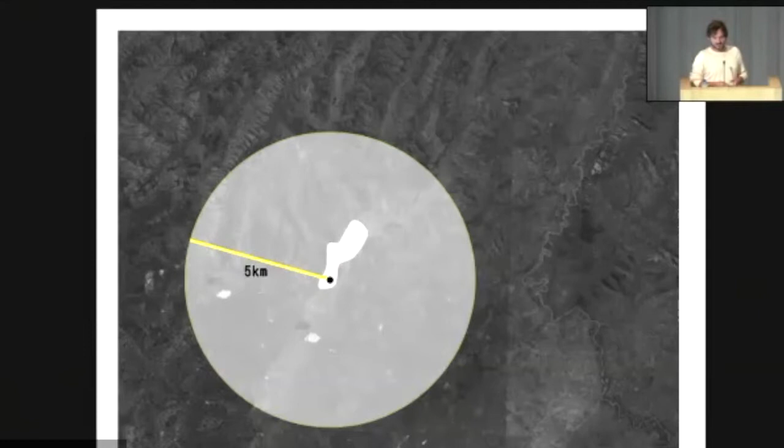It started as a kind of detective story. We had a radius of 5 kilometers, and we looked at all the materials available within that range. We had stones, we had talks with forestry management, we had talks with hunters about how they made things, and there were sisal cactuses, which were very fibrous and interesting to use.

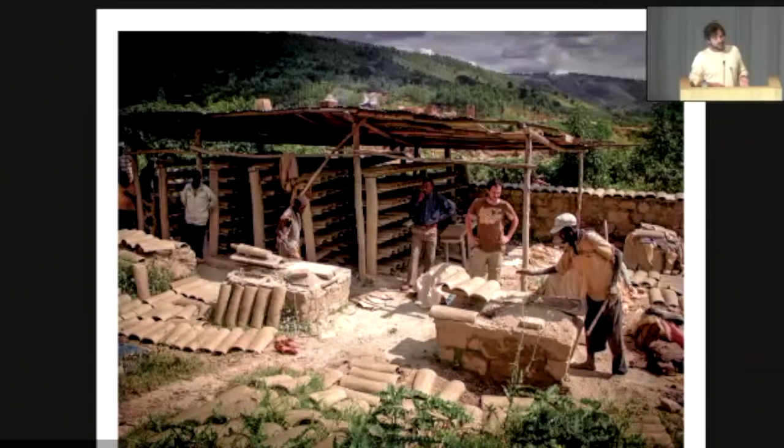There were also stones, but I think one of the most capturing moments during that first project was realizing the resource straight beneath us, which was earth. We had this encounter with a villager who was taking the resource straight out of the earth, and developing adobe blocks, sun-dried blocks, dried for approximately 2-3 weeks in the sun, then straight used in the construction of their homes.

It was a very interesting material, also because it was quite low threshold, but it could also be reused in an eternal time.

Between this picture and the previous one, there's one year. Because of course we had this understanding of a collection of locally sourced materials, and we were very interested to continue with the materiality of earth. But we didn't have any understanding of it to the extent that we could say we can build with it, so we went back.

We had this full year in which some of us, one of us went to do earth studies in Grenoble. We had a full year of researching and doing workshops. We left once we found we were ready, and went back to look further into the material.

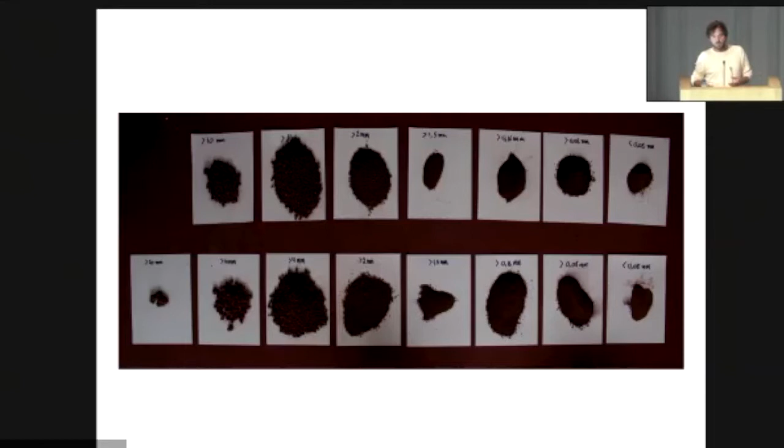These are tests done in the early times. There's a sedimentation test, which you saw before, to understand the granulometry of the finest particles. There's the sieving, in which you determine further the amount and types of earth you have in your soil.

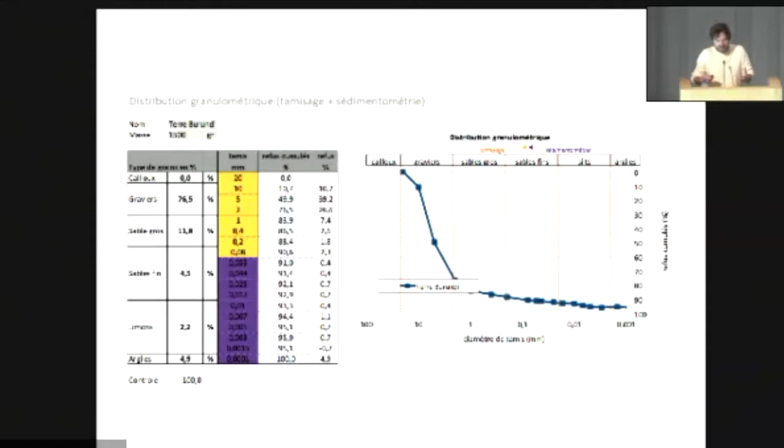With this, you're able to develop graphics you can show to clients, to say, look, this is really academic research material. But actually, in reality, it's a very tactile research.

If we go back to this first study, with that we could know, okay, we have this type of soil, and this type of soil means for us that there is a technique useful to use this soil which we have.

The decision was to go further with compressed earth blocks. The reason was the need of a machine, so it had a slight mechanization in the process of the block.

Initially we thought, okay, we'll make our own machine. On the internet we found an open source site in the US with plans to make your own machine. It took us one month to actually find a similar machine, which was sent in the 80s, just next to the site.

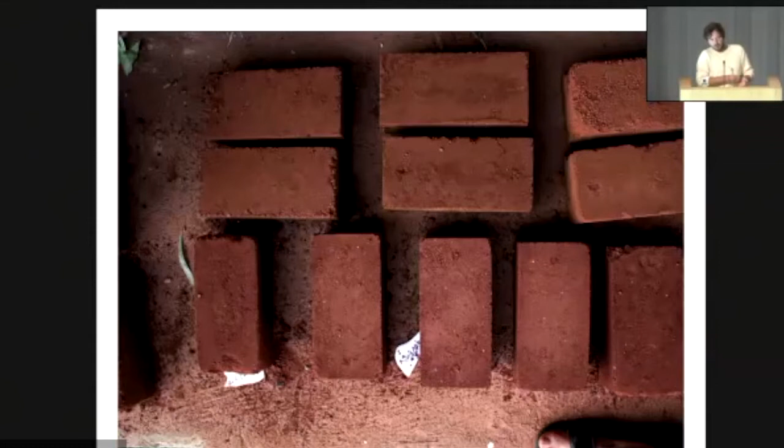So the next step, okay, we have the machine, we made our blocks. We made a matrix, we made a selection of blocks, and then we had to choose which block we could actually use. So we needed to understand the strength of the block.

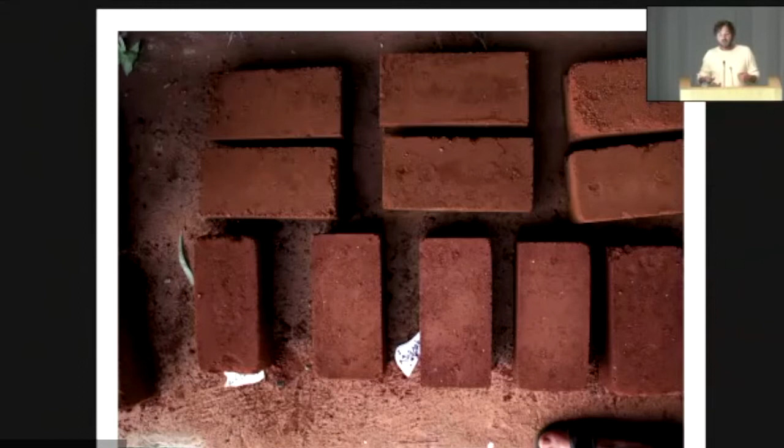Again, we went back to YouTube. YouTube is a wonderful platform of teaching. There we found certain types of machines we could make to test flexion and pressure. So we did that, and we broke all of our blocks like that. We could understand which one seemed the most strong and most interesting.

And then we started to design, because then we knew actually with what material, with what construction element we could start designing or building.

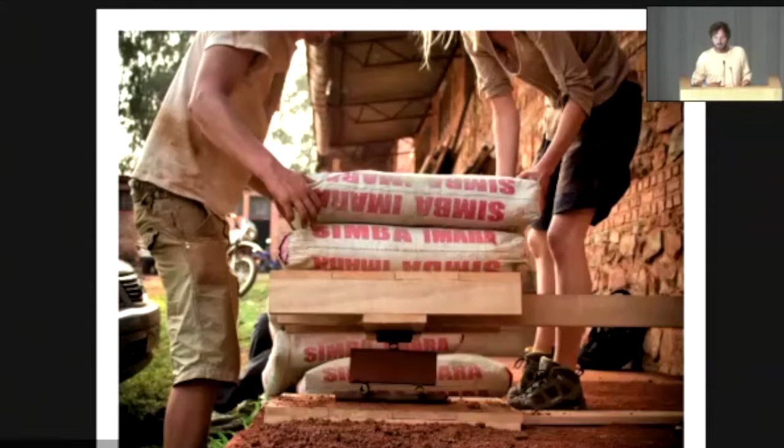There's another element which is interesting to understand how this first project came to exist. There was no contract at all. We were not insured at all. There was no kind of entity which would save us, let's say, if there were problems. This was actually a team of people, workers, craftsmen, which all together tried to make this happen, also because we were not able to back ourselves up with norms or anything else.

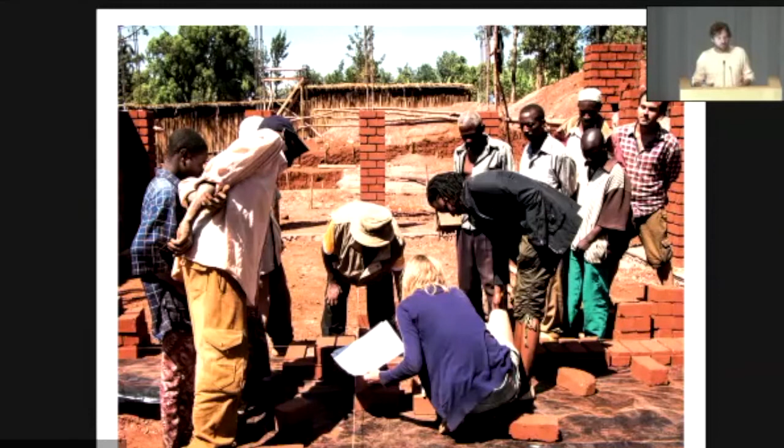Within that, my biggest teacher right after graduation—this is a project of, I think, 12 years ago—was the foreman and the craftsman. I learned from him what I could never imagine learning from any teacher. It was really the understanding of material, the texture of things, of the resources that are in hand, because he always worked in that region. He knew exactly where to find stones, because he understood the geological layers almost, and he knew these are hills and clay goes down in the valleys, and you have rocks which become exposed, and these rocks are interesting to use for the parts of your building that you need to reinforce against water, and so on. So it was my best teacher.

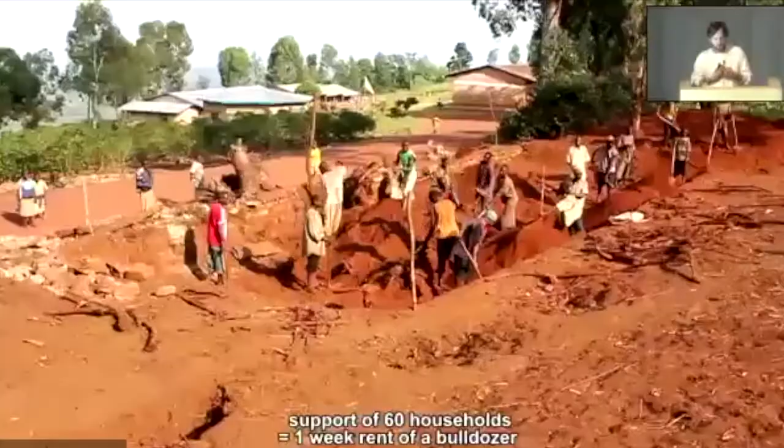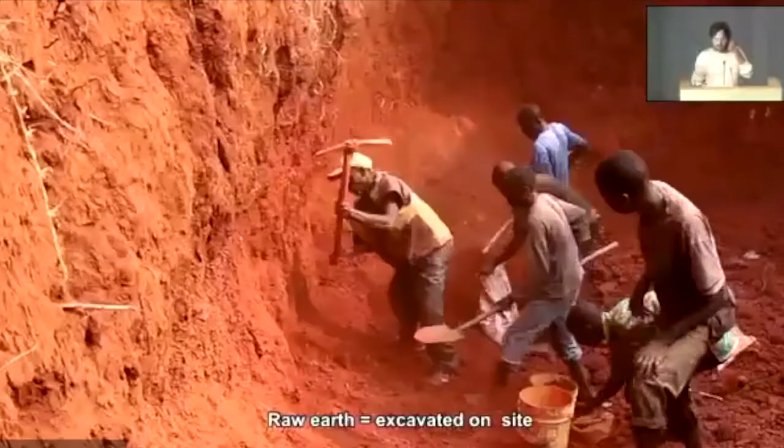Thank you so much. I like to show this one because afterwards there's another key project which has a similar video, and for us this whole construction process was so enriching. We had an enormous amount of people on the site working, because when we arrived we had a catalog of materials from school which were not at all possible to buy there. So using the material on the site, we first designed a kind of production.

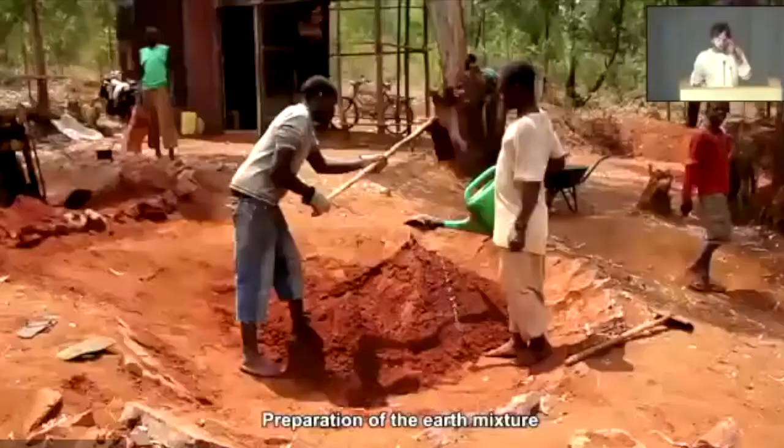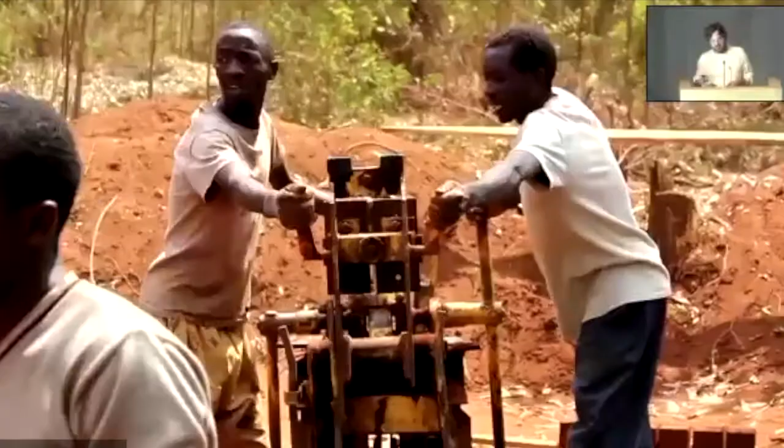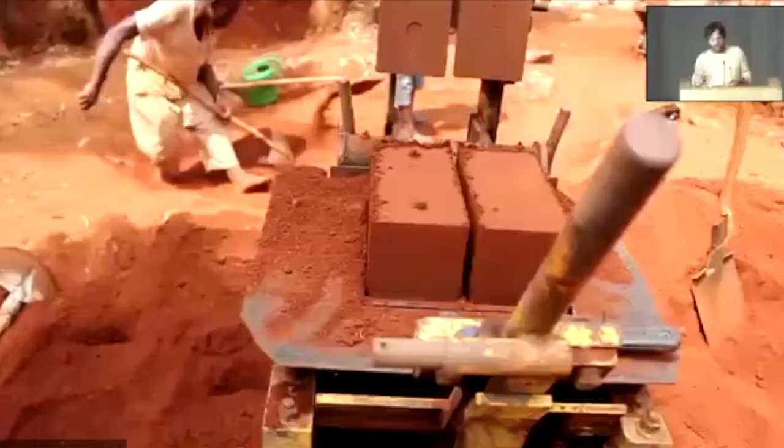So the building site, before it became a construction site, it was a production site. The material earth was sieved, the smaller particles were used for the blocks, the bigger particles were used later on for the squares. There was a whole storage unit on the site in order to dry and cure these blocks during 2 to 3 weeks. So you start understanding a construction or a building through a process of production, rather than buying your materials straight away and building with it. So we got quite close to the resources with this project.

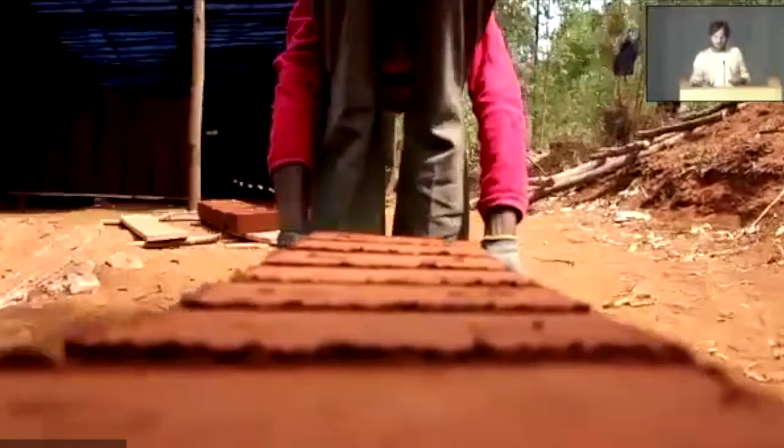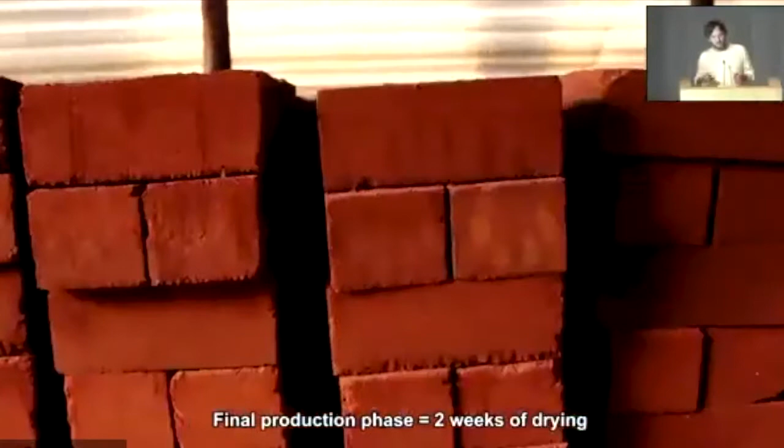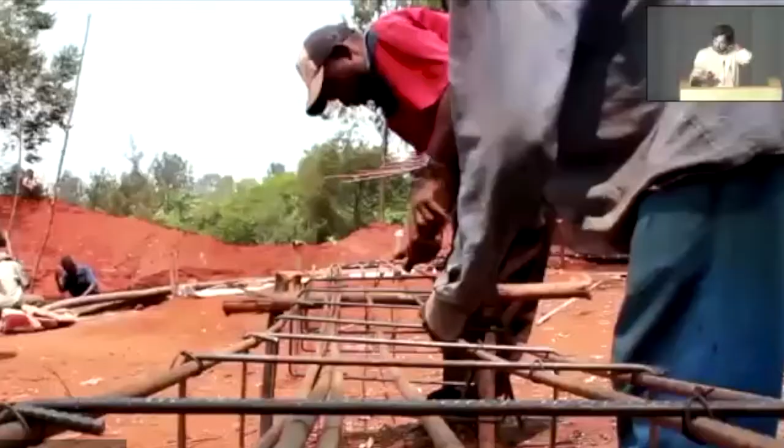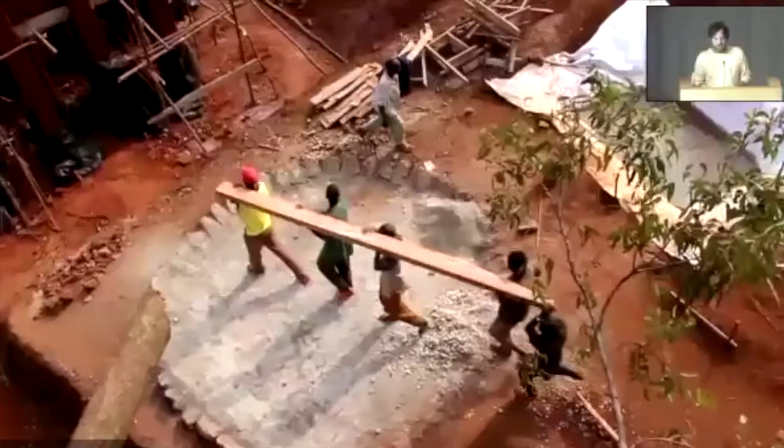And I think the elements we learned from this project were things we afterwards tried to implement in Belgium, because you have to imagine this was our first project, so we knew nothing else but this way of working. Here you can see the building itself was completely made with compressed earth blocks. It has some reinforcements in certain columns due to earthquake resistance, and then it was just earth mortar. The wood as well was cut on site from the place we were going to construct, done 6 months in advance in order to dry as much as possible.

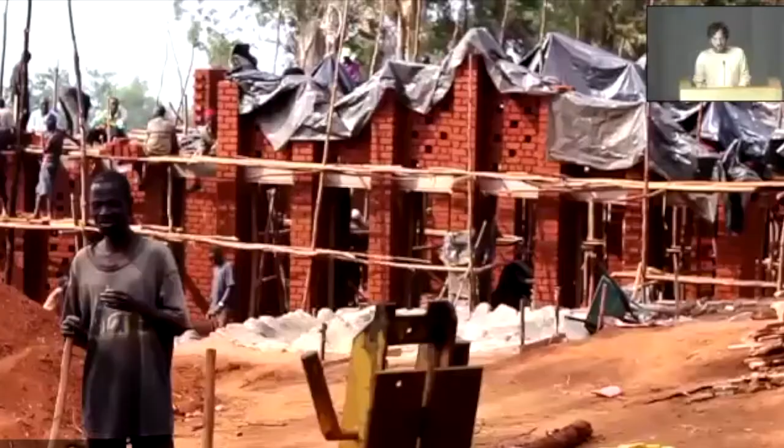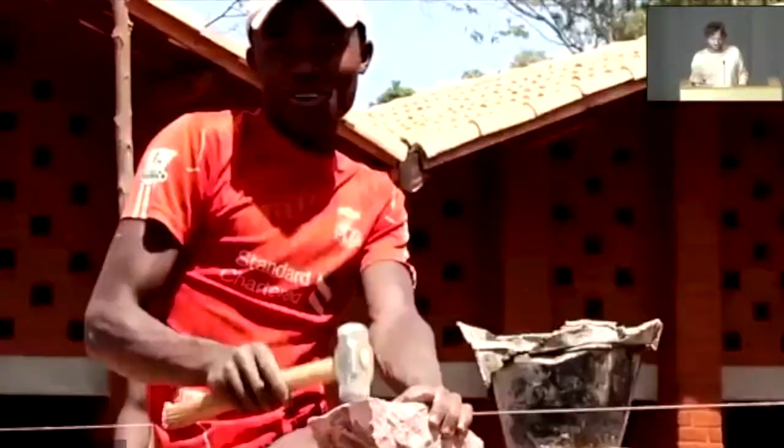And this was for us quite an eye-opener. The same with the sisal—we worked together with a hunter who explained to some workers how to make from the sisal cactus a rope, how to knot this rope together to make a large hammock, and how to place that hammock later on within the library. So you had all these stories which were starting always from the resource. They were very proud of that big hammock, I have to say. So yeah, this is the first project, but also a key project for the whole development of the ideas and visions.

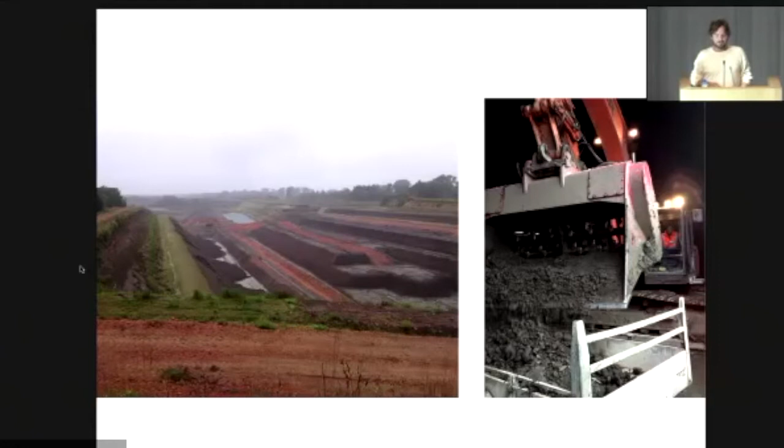But this meant for us, how do we normalize and prescribe a material which is locally sourced and not on the market? So first it meant creating a protocol - doing similar testing, gathering all the resources of the region: sands, broken gravels, clay, and creating a matrix of different mixes to test. This time it was not with our own wooden toy, but at a laboratory in a university where we got official results.

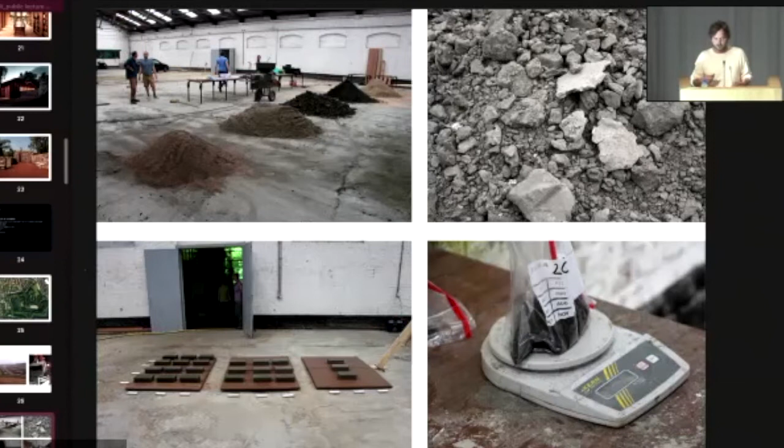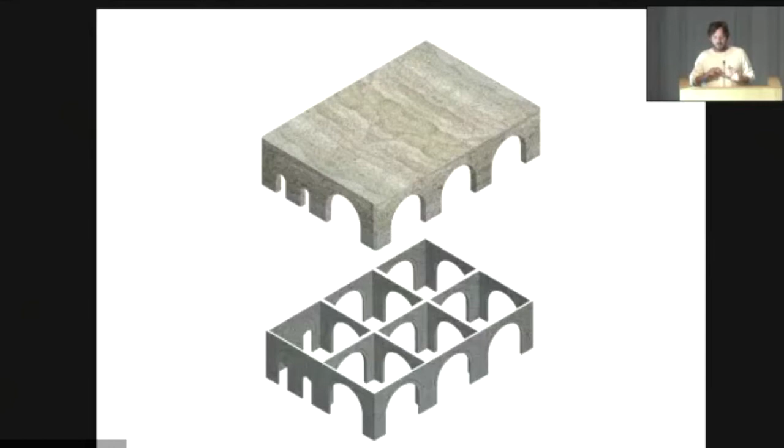Here you could see the system - it was a complete load-bearing element, which was then duplicated in a connection of spaces, of classrooms. All around there was this kind of hempcrete insulation. It was as simple as that, because it was standing also in an existing hall, which we decided to keep.

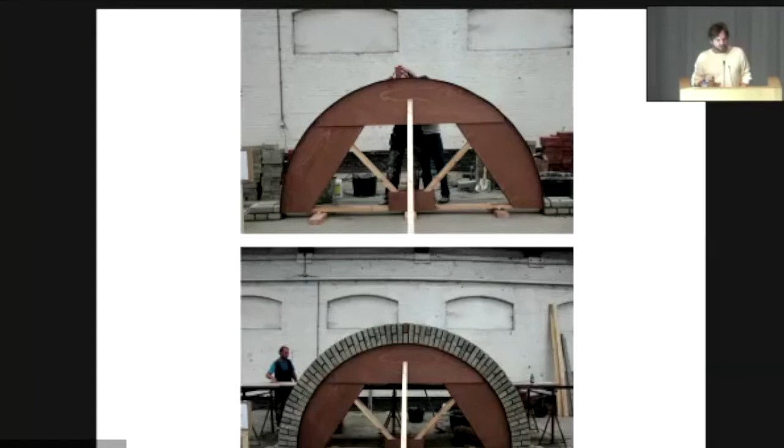Another element - so there was this part of creating a protocol for a locally sourced material. But secondly, we didn't find masons who were able to estimate the time it would take. One, because they were just not feeling comfortable with using a compressed earth block, which they never used before, but also because we couldn't find masons who still did really load-bearing brickwork, because nowadays of course these are all reinforced.

The same happened with the engineer we worked with - he was not really feeling comfortable with the idea. For the engineer, we got a historical professor in architectural theory to help him out, to explain a bit how this works, like in the Middle Ages.

Another thing - we contacted the contractor to create a prototype which would enable us to understand the timing he would need, and for the engineer as well to actually just test it out, if it really stands. A very simple thing, but it meant us not being behind the computer drawing arches, but making the blocks and creating a different process to reassure everybody that this actually also works in Belgium.

So we had done all that, and then the next step was we could estimate our arches. And the estimation went times 10, of course, because in Burundi it's interesting to use these materials since it's labor intensive - labor on their economical market is quite low, materials are quite expensive, so there it has a kind of economical logic. In Belgium, it has no economical logic at all - it's completely against the principles of our system.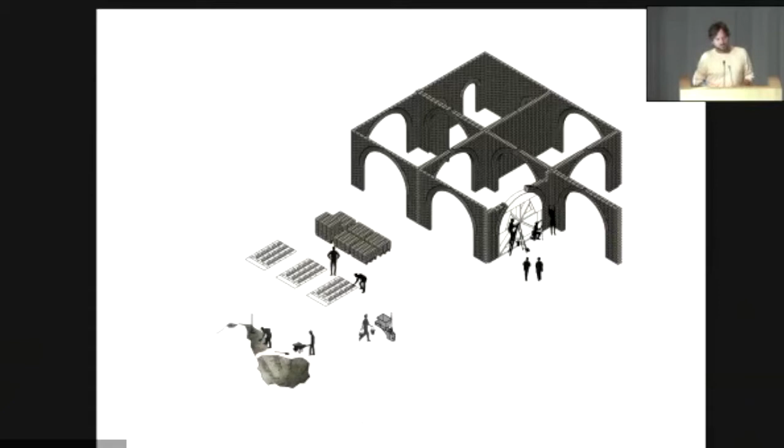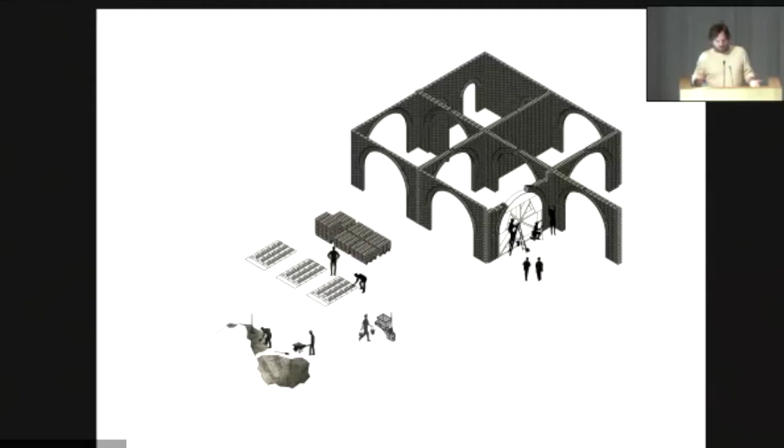So we needed to come up with another solution, which meant building or producing all the blocks with workshops - it was kind of new, well, this project is 6-7 years ago, this is material or a method from back in the 60s. What is happening now is the same but a different situation, because also in the 60s these kinds of systems came up. So to produce all the blocks, we organized a 3-week workshop, and we produced with participants 17,000 blocks, which we then sold for a symbolic €1 to the contractor who is going to mason it.

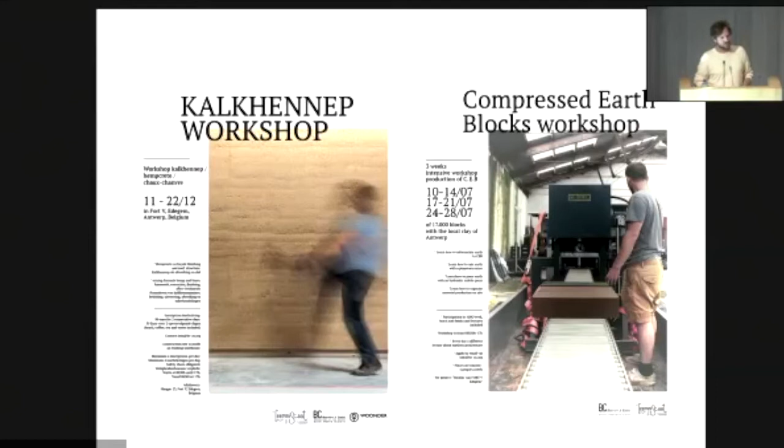Not only were the compressed earth blocks a problem, but also the hempcrete was an issue, because it's also quite a labor intensive material, and at the time not very used by many contractors. So for that kind of whole insulation construction, we used a 2-day workshop during 4 weeks, small 2-day workshops to implement. These workshops had very heavy duty and hard labor, but mixed with lectures.

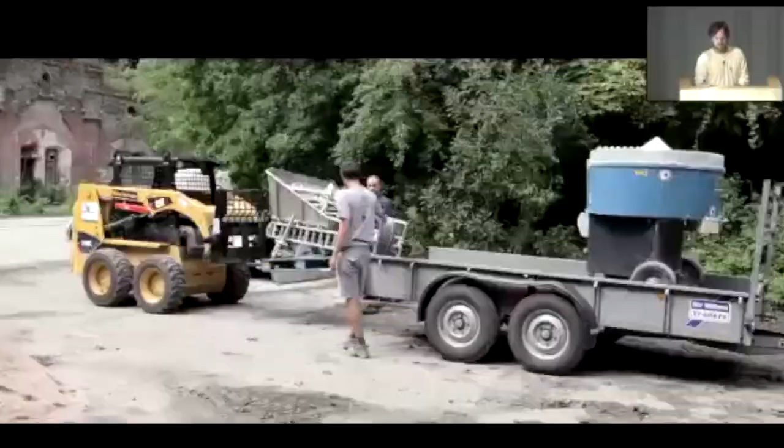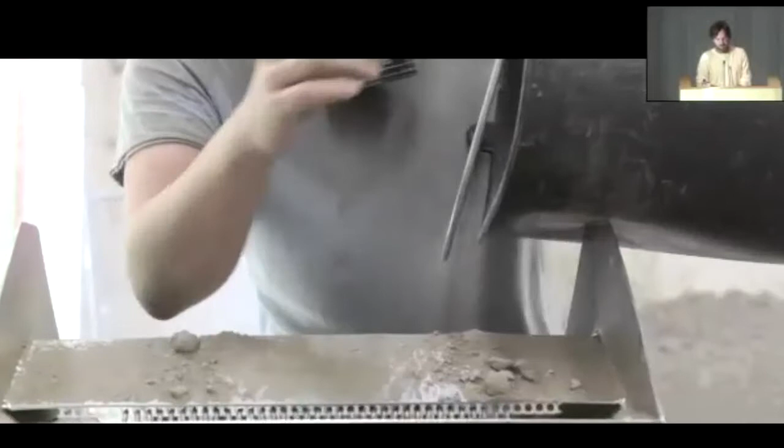We took on parts of the execution for a public project under the contractor. This meant we had to rent equipment, bring in all the material, and sieve it. This is the first days of the workshop in which the students got to learn the machines, hydraulic presses, a different type than the manual press used in Burundi. Here you can see the production line, which was set up also on the construction site. We brought in the resources and produced all of them on site.

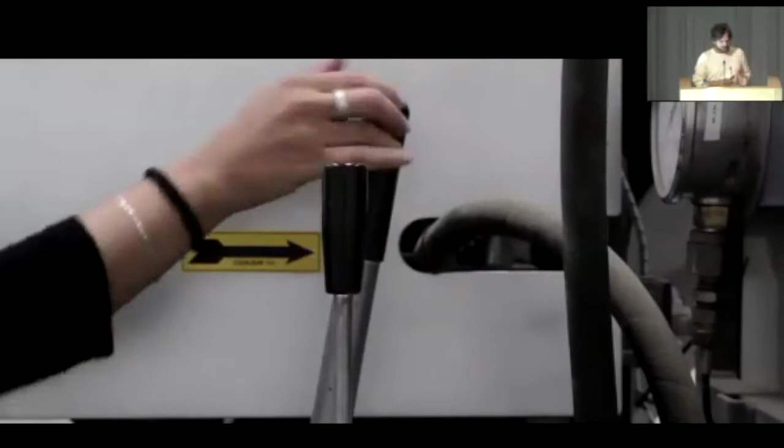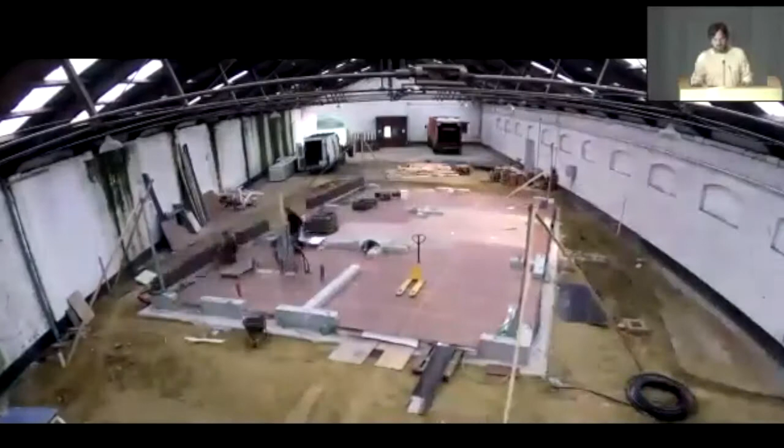There's a protocol we had to write out for the client and for the engineers. Each, I don't remember the exact amount, each 100 blocks, one had to be taken out to ensure the quality of this material, because it's not bought in a shop where you have a tag, and if it breaks, you can go back to the producer. These were the lectures, and then these blocks were given to the contractor, which started to mason within.

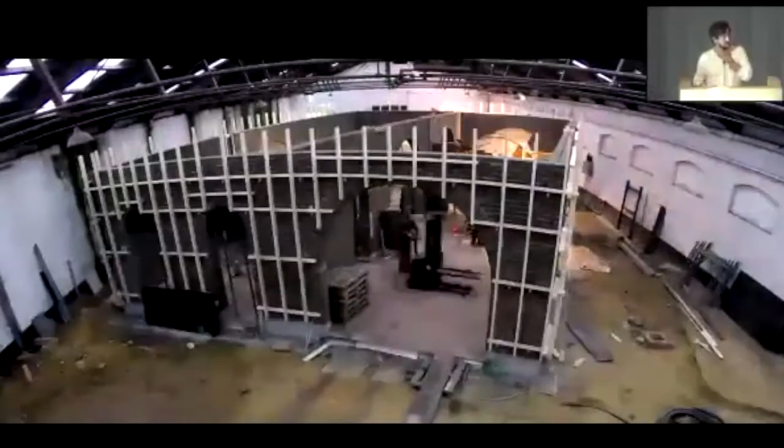To do all this, there's a need of working with the team, having a good relation with the contractor, because everybody is taking risk. Everybody here is experimenting, and there was an issue, for example, with the engineer not accounting for the amount of water in the block that has to dry. So at certain moments, the arch was starting to get a bit too low than was meant.

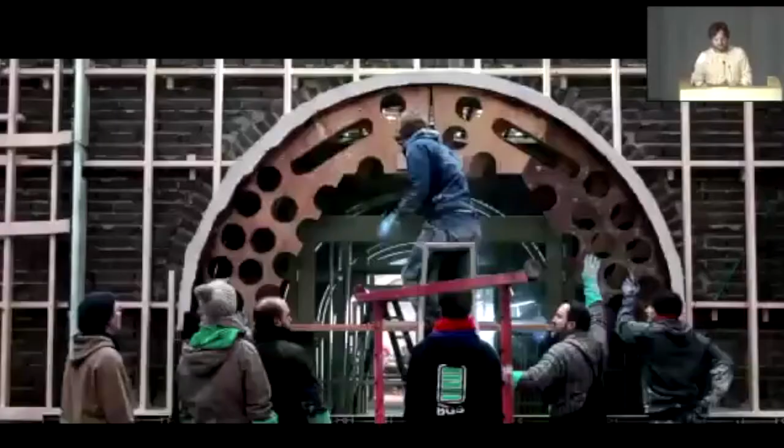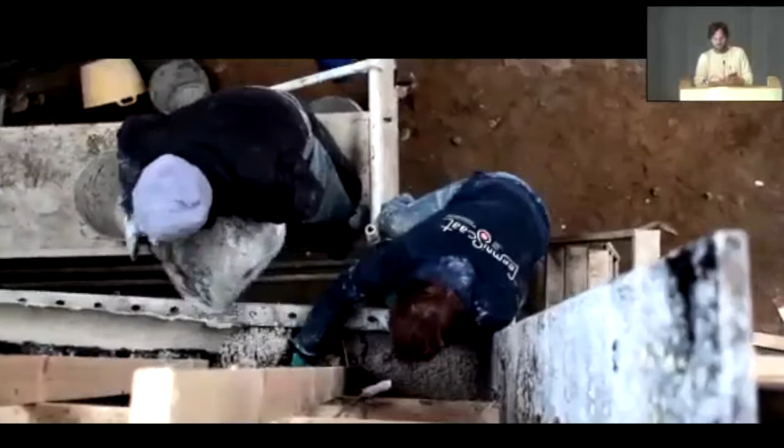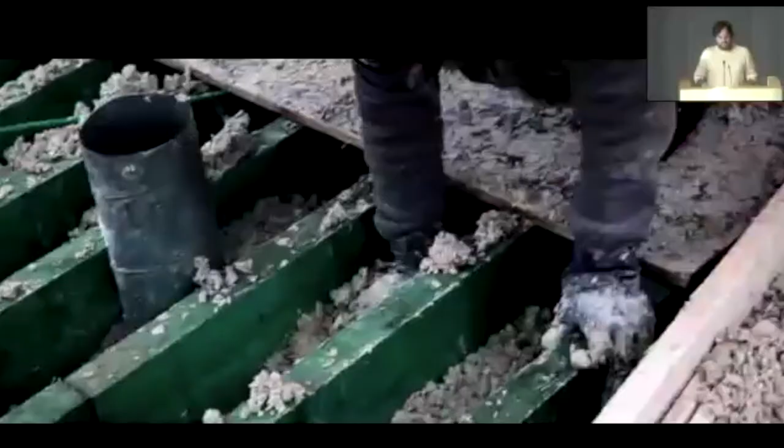This is the workshop for the hempcrete, which was set up. Hempcrete being a combination of hemp fibers and lime, which has quite a good insulating value, of course not like the best chemical insulation materials. And so the whole roof was also the first time to test it out. The whole roof was rammed and insulated, so it's a very simple system.

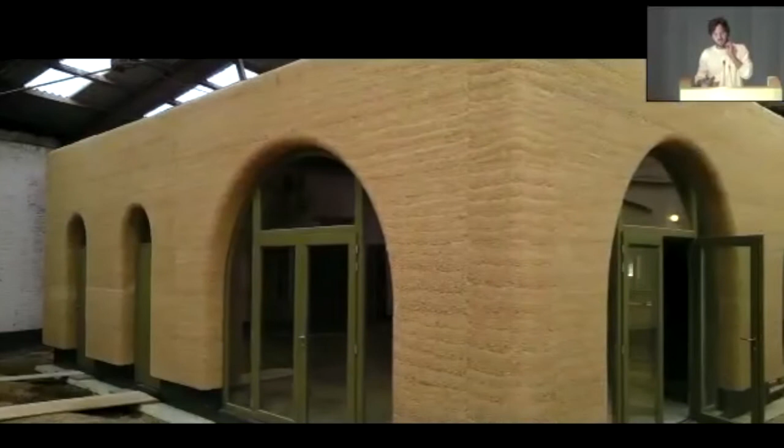The reason why these projects are so simple is that at the beginning we already knew we had to do this within a workshop system. So we needed to make a building which was very simple, readable, not too complex, not too many technical or super difficult details.

I think it's really nice to see these two projects next to each other. Maybe if I have 40 minutes, this might be enough. You can go back to the presentation.

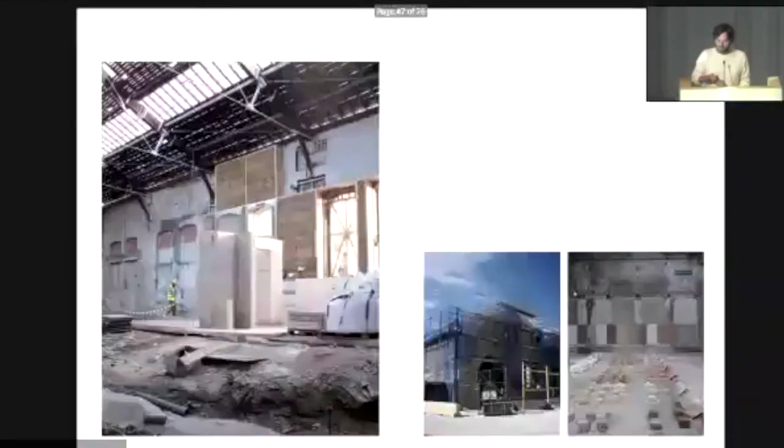I'm going to jump to this because this happened after, and it makes logic in the story. Workshops, okay, how can we upscale? Because the workshop is not the solution to build all of our public buildings with biosourced and geosourced material in workshop types. We can't keep building 50 square meter pavilions forever.

So the next step was to understand, okay, it works brilliantly, people are very happy, but how can we start to upscale and make this possible for other people, other architects more exactly, to use it? And there came the idea of BC materials.

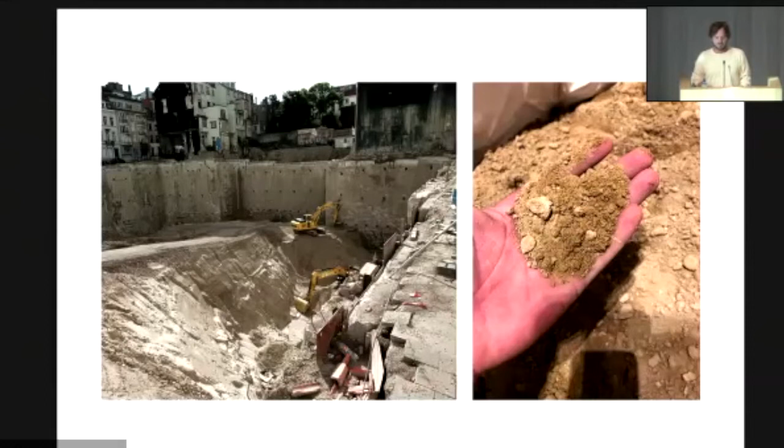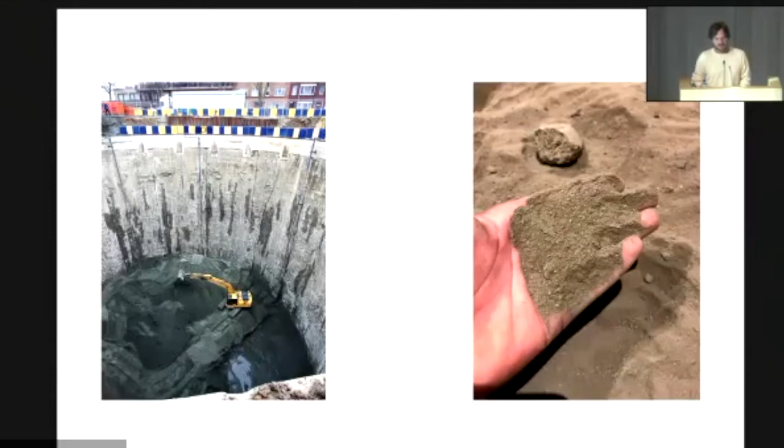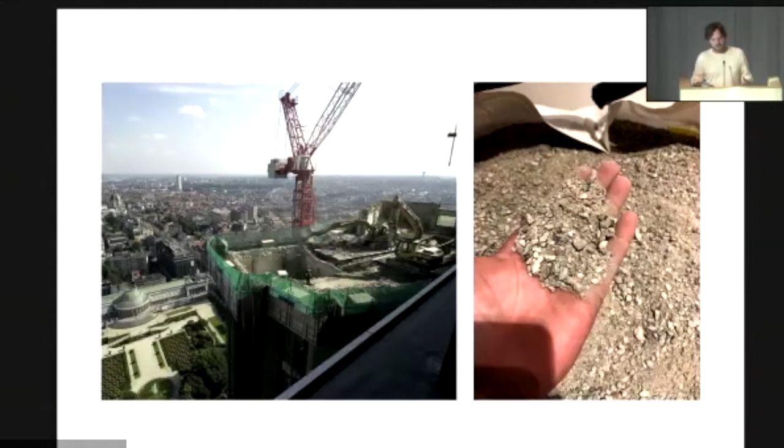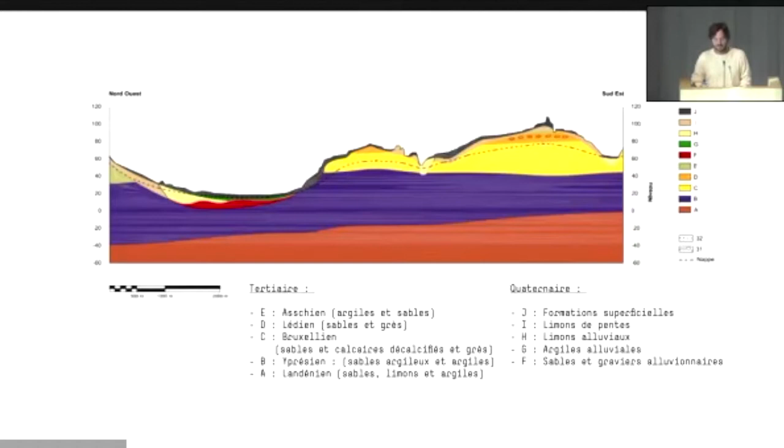This meant we had to research all the different types of materials makeable with the excavations of Brussels. We've got three main products which went through the whole stages of normalizing, regulation, and so on.

These can be bought at the cooperative: you have the Brickette, which is a kind of compressed earth block; you have Brusseleir, which are earth plasters — we've got them in 5 colors if you want; and we have the Kastar, which is a rammed earth mix. We're not executing anymore because it doesn't make sense, but we're preparing and developing mixes so that contractors can use them or architects can prescribe them.

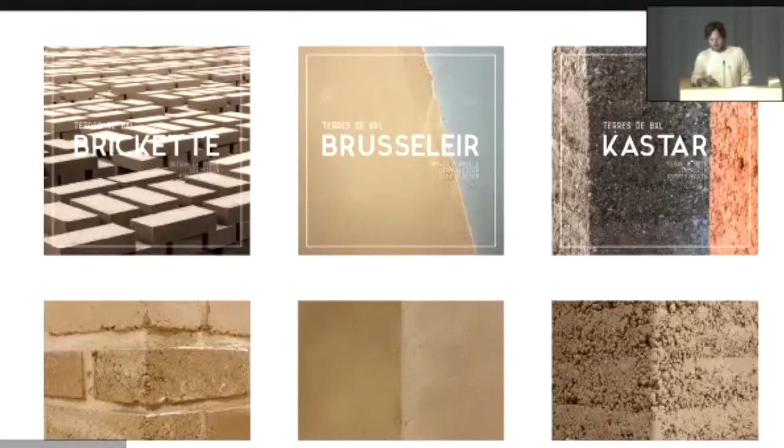There's a certain number of buildings in Belgium in which the materials have been used, or where we've been linked for consultancy in order to upscale this whole vision — in Bokreek and many, many more.

So the moment came we had to build our own production facility because the amounts became bigger and bigger. Of course, we have architects, so they designed the production facility. We have some people who are handy, so they built it themselves, and we got a site for 5 years, so we had to invest ourselves. Our whole building is also demountable because we know we might have to move in a few years.

These are large concrete blocks, third-hand construction blocks that you just stack on top of each other. The whole roof is fixed with — I don't know how you say that in English — the straps that trucks use to close their loads. That holds the whole roof to the wall.

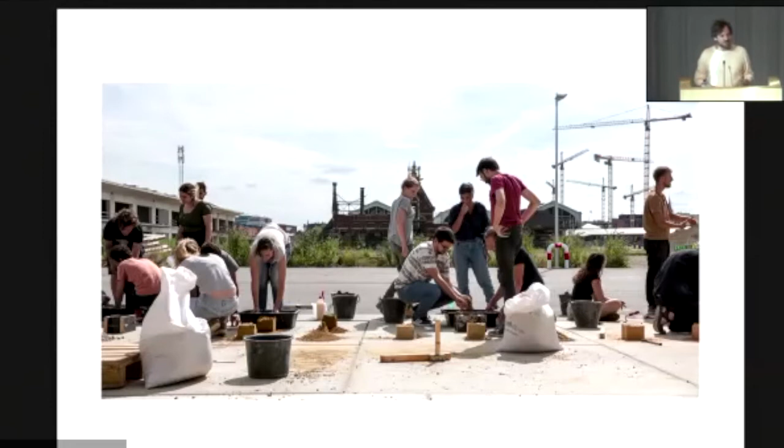And what happened, and that's when BC Studies also made more and more sense, is we got visits from schools and universities to follow courses and workshops within the production hall, because suddenly we had all our equipment ready, and architects were calling us to develop prototypes for them. At a certain moment, within our construction hall, we had groups of 50 students coming in, trying to understand how the material works.

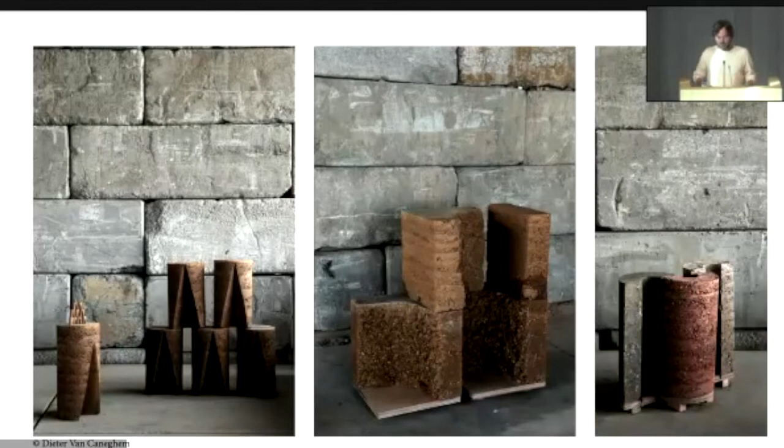A whole new line of work started for us as well: sensibilizing students, but also young architects and construction workers. We now organize workshops for construction workers at their sites, to make sure that what we develop is also usable on the market. The next step is to make sure the prices work on the market too, because that's still the next step — to understand how this is viable for larger scale projects.

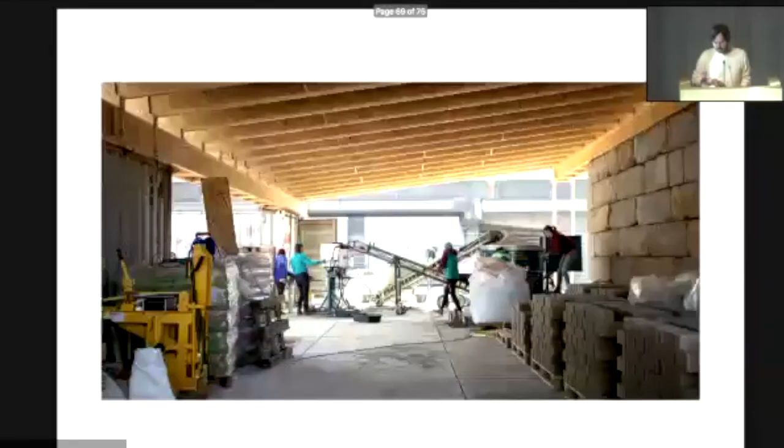A very last one — now I have to go back. Maybe I want to end with one project, this one here, in the south of France, which we started.

For us, this is kind of a bullseye project in the sense that we've combined our three entities. We got this commission from the Luma Foundation, which has a chapter in Arles called Atelier Luma, to build — we renovated — their new workshops and laboratories, where they develop new materials from the resources of the Camargue.

So for us, a kind of dream client, which was kind of researching the same thing. We started this project on very thorough research already done by Atelier Luma. By the way, this project we do together with Assemble Studio from London, to map out all the resources first, and not only the resources but also all the contractors and associations linked to construction.

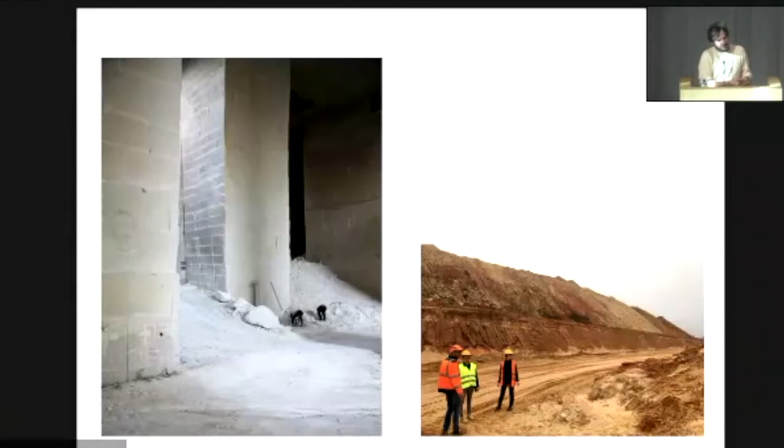The first days we did the same, but went more precisely, understanding there's a quarry, there's quarry waste, a kind of white powder that comes when they cut the limestone stones in the south of France - a waste that's quite interesting. Similarly, there are sand quarries where they wash the sand before selling it, and in the waste system there's a kind of clay soil left behind.

With these first inputs, we started again understanding what were the possibilities of the local resources we had.

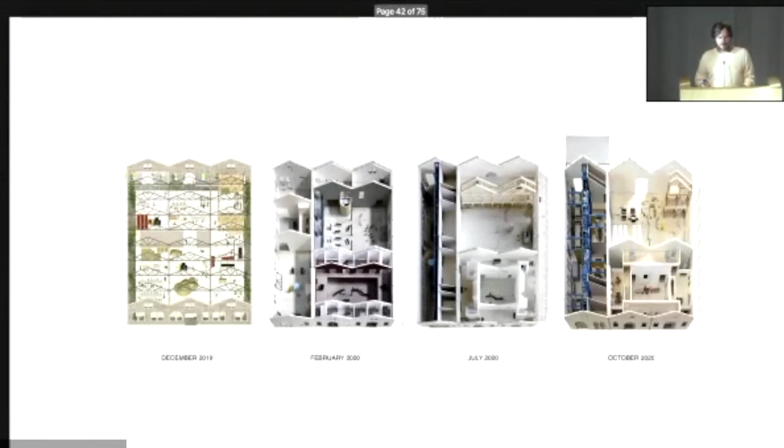Doing so, we organized our work not as a typical commission in which you work and develop, but we worked in residencies because we wanted a very close collaboration with the client and also with Assemble from London. Each time we came for one full month with the whole team on site, working on models, samples, and prototyping.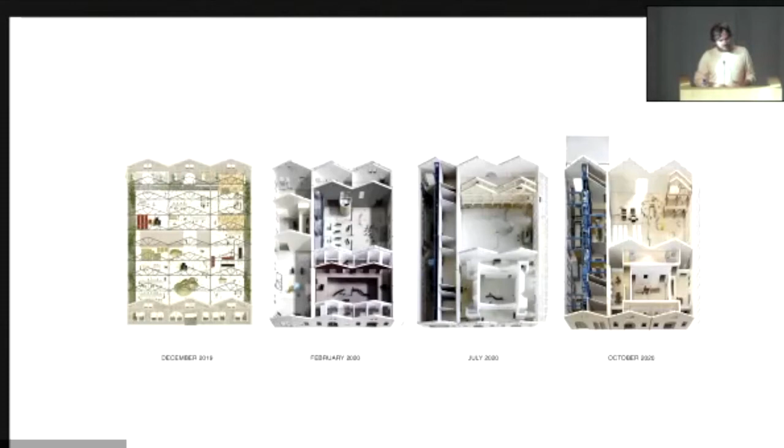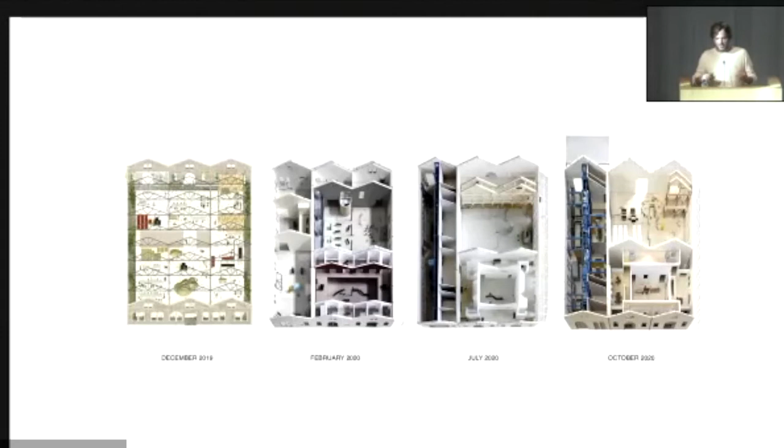So there was a completely different way of experimenting and looking at the building as research in itself. The building was a prototype, the building was a research.

From samples, the models became bigger and more concrete, in the sense that we developed a kind of rammed earth very specific to the site, reusing the white powder of the quarry. So we got this beautiful white rammed earth, also reusing the gravels from the demolition of the site.

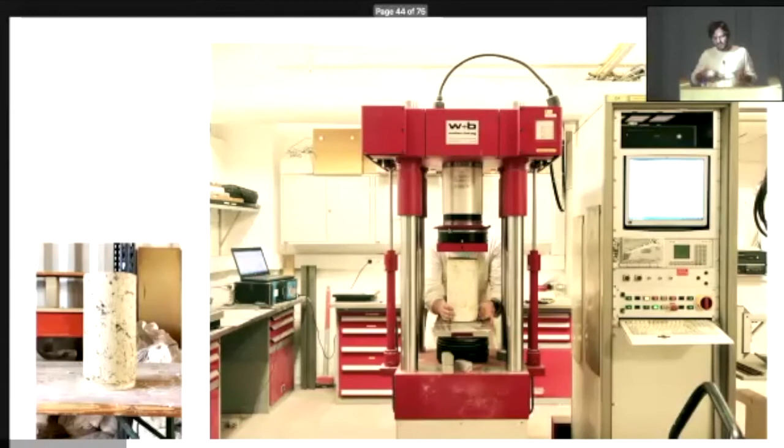So again, these kind of lab tests, creating protocols for the construction, and the machines get bigger and bigger each year, I tell you.

It's an interesting question about digitalizing, because these are new machines being developed in Toulouse, France, where mechanization and palletization are included in the process of making these kinds of blocks. There were also plasters using algae in place of clay, because dried algae has similar properties to clay.

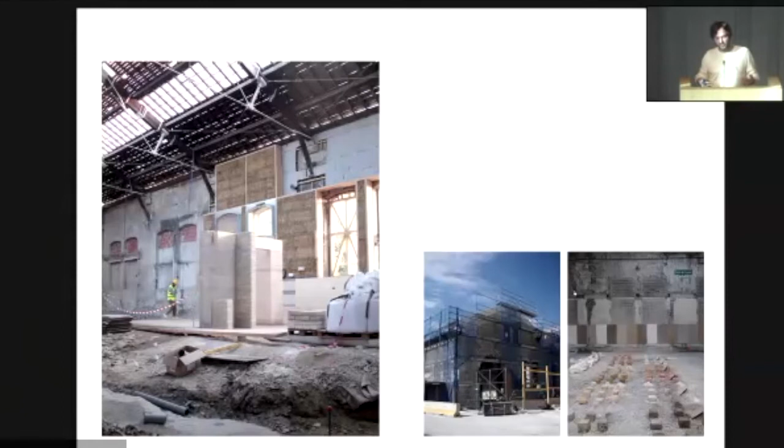It's an ancient plastering system coming from Japan and Korea. So developing our whole set of materials, which then goes from sampling on to prototyping again.

Prototyping the wood, we were working with clay-based oils. It's a super interesting project because it really tries to define things, and it's pure experimentation. It goes quite far in that, but is also looking at the building as a mine itself.

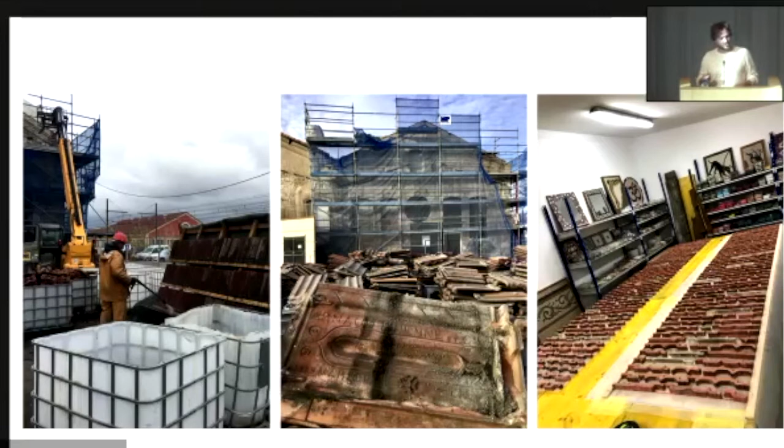So the tiles are reused, of course, cleaned. The broken tiles are reused in decorative terrazzos, but the tiles are also used in the exterior render. The whole building is insulated with rice straw, because there's an enormous amount of rice used in Camargue.

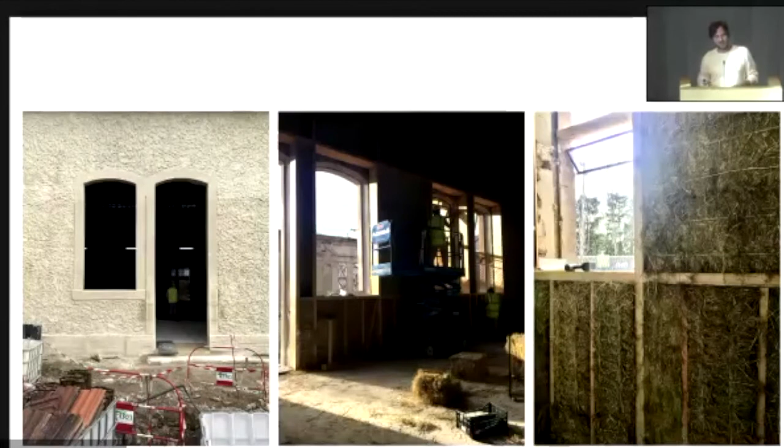Next to that, you create this kind of content around the buildings before even starting. With BC Studies and Atelier Luma, there's a whole trajectory where you have a chantier d'insertion, in which contractors actually come to test out materials and build the prototypes, workshops and seminars.

So we're starting to rearrange even the way of contracting, and seeing if people can learn from other people. This means our plan becomes almost a plan of prototypes, a plan of studies and research.

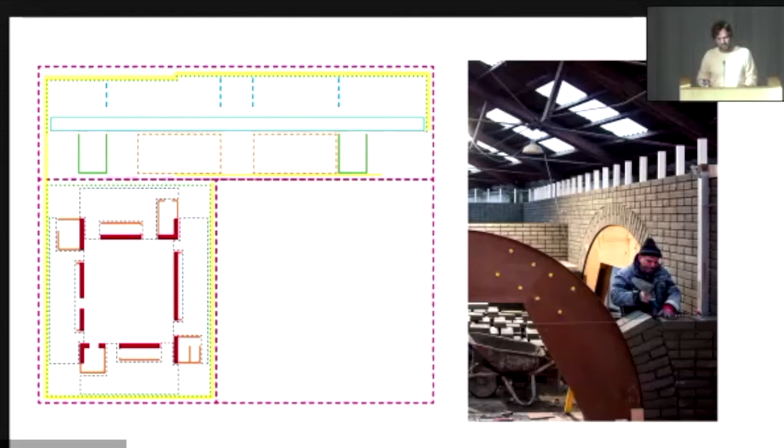So this is kind of a bullseye in which the three entities are able to take out elements and take them further, in order not to come with solutions, but to test out the possibilities and to incite other people to look further than a typical architectural company.

I had taken it out because I cannot show it yet. Okay, but this is kind of the final part.

Of the part of the lecture in which you understand the reasoning why these three entities are there. Because as a practice trying to go beyond the concrete, in our case we're going in such a direction that we need to even formulate and work with legislations, trying to make sure that these kinds of materials we implement can be applied not only by us, but by other people. So yeah, that's a bit of it.

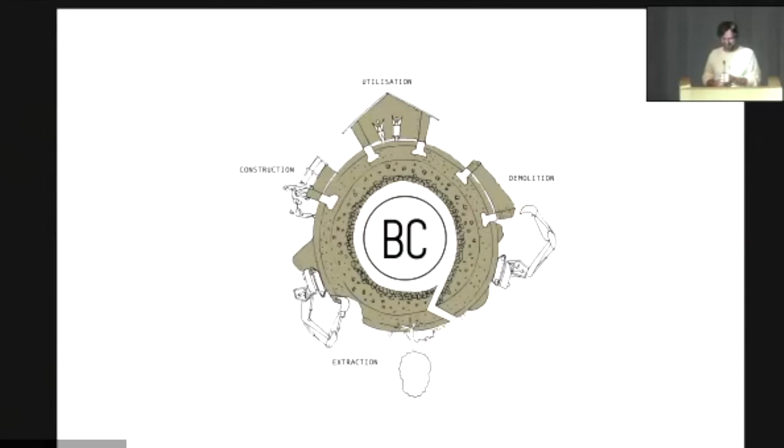Thank you very much, Lawrence. You were talking about eye-opening projects, and I'm sure all these projects are really for us architects in Switzerland really eye-opening. So thank you so much.

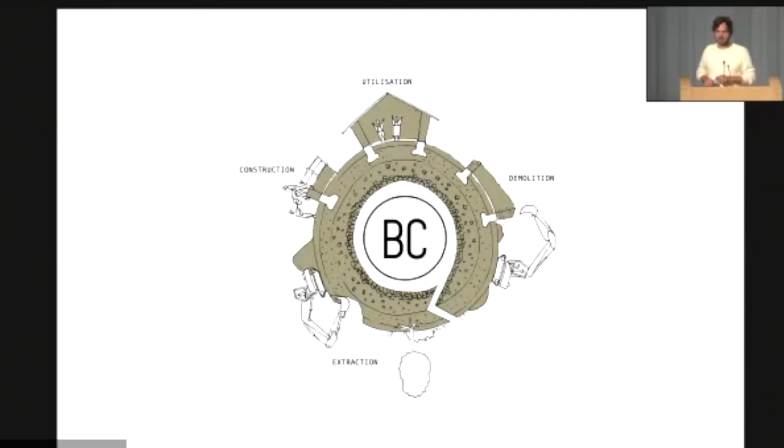Thank you for your presentation. I have a little question.

In the last project, you told us this line of machines getting bigger and bigger. I'm really interested because in the first project it was really labor intensive, you couldn't use any electricity or other things. And in the end, it's in Europe again, you just cut the labor out and do it with machines. I think it's in a good way, but in the end it's the same as in the 60s and 70s. So do you think the process goes further and at some point we're at the same point we are now? Or can we change something, or do we have a broken system of cost and labor that we should change?

It's a very good question, which I sadly have no answer to, but it's completely correct in the sense that there's a kind of economical market which currently dictates a certain direction. I think indeed what is happening now is similar to what happened in the 60s. But what we're trying now a bit to see, and I think it's not the solution, is the way the company itself is structured. So it's a cooperative, it has a different status.